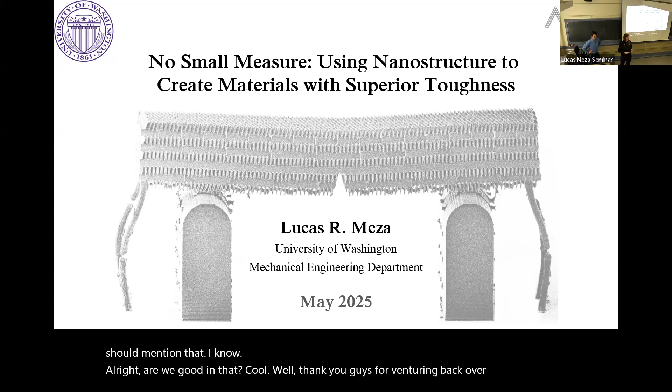We're lucky enough today to have our own Lucas Meza. In case you haven't met Dr. Meza yet, he got his PhD from Caltech, where he did a lot of work on ultralight metamaterials, and then he traveled to the University of Cambridge for his postdoc, where he worked on 3D woven fiber composites. It's been really fantastic to have him here at UW. I know it's never easy starting around or near the pandemic, but I've been amazed at the collaborations he's established around campus and in many different domains. He's really looking at how we can use nanoscale architecture to build better materials across many different domains, and it's just the start to many great things. So with that, we'll turn it over to Lucas.

Thanks, Kat. Really excited to be talking to y'all about what we've been doing for the last 5 years. Building a nanomechanical experimental group in the middle of a pandemic was not fun.

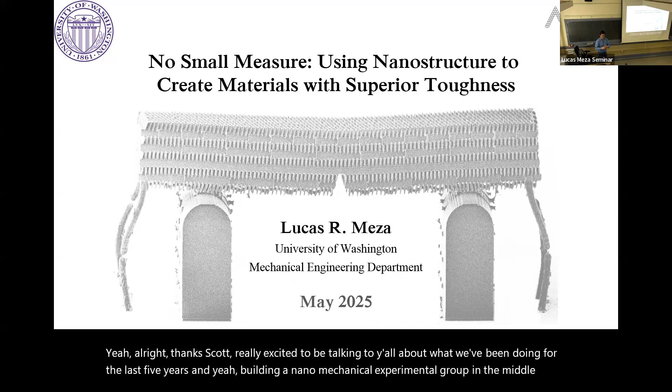Today, I'm going to be focusing the talk on fracture toughness. Toughness is a really weird property, difficult one to wrap your head around. I started this journey not actually understanding fracture at all, so I came from totally outside the normal fracture mechanics community and have tried to make some inroads there, but from the bottom up.

So to get started, the question we ask with all of our research is, how do we make new materials that are better, stronger, tougher, lighter, et cetera? There's a science fiction version of reality — funny, Kat, that you should mention Iron Man, because this is like ideally what we want to do. I want to pull up this AI periodic table and just moosh some chromium and some palladium together and make some magic material that's going to fly in an Iron Man suit. This is not how engineering works, unfortunately.

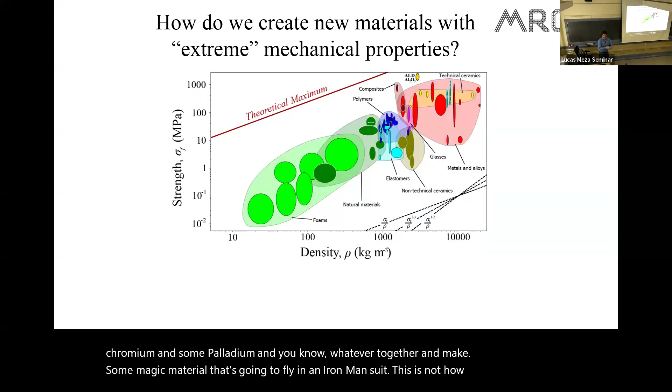Most of the time we have these Ashby plots, or material property plots. This is a plot of strength versus density. I have heavy, strong stuff up at the top right, metals and ceramics, and light, not-so-strong stuff down at the bottom. Our goal is to push into the white space of these material property spaces, make things as light as air but still strong as a foam or a natural material, or take extreme strength materials like diamond and turn them into something ultra lightweight that we can use in engineering. There's been a lot of interesting case studies of that.

My work takes two pieces of that puzzle, trying to break into these new property spaces: architecture and nanomaterials. I'll talk about what all of those are in the context of fracture mechanics. Architecture is literally everywhere around us.

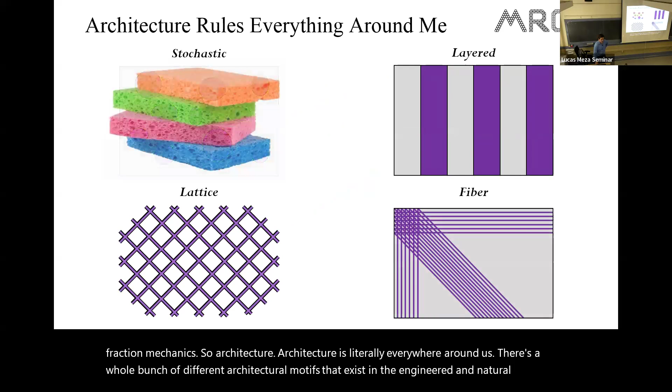There's a whole bunch of different architectural motifs that exist in the engineered and natural world. Most of you probably have a stochastic material sitting on your kitchen counter, and you're probably wearing a layered material right now — the layers in the soles of your shoe give you grippy things to walk on but still squishy things so your feet don't hurt over time, or you may have a reinforced sole for hiking. Now that we're buying lots of stuff online, we see lots of corrugated materials, cardboard boxes — you're increasing the bending stiffness of a piece of paper by adding corrugation. We're probably also wearing fiber composites: our fabrics aren't solid sheets of polymer, they're woven fabrics, cotton or polyester, woven into a structure to be flexible and breathable. We've used architecture for a very long time historically.

I am going to focus on this in the context of fracture. Dating all the way back to some of the earliest materials in recorded history, we have straw-reinforced mud bricks.

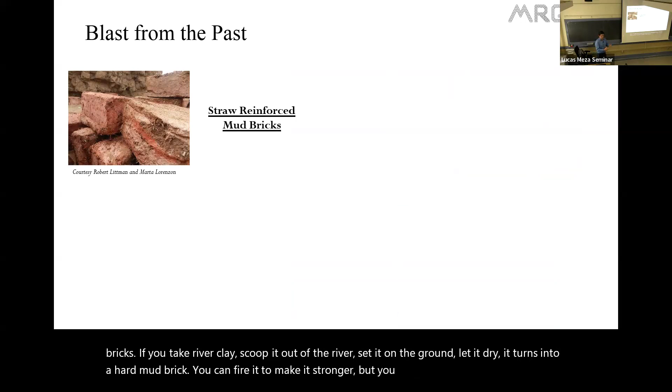If you take river clay, scoop it out of the river, set it on the ground, and let it dry, it turns into a hard mud brick. You can fire it to make it stronger, but pre-fire, we didn't have the ability to do that, so we just let it dry in the sun. If you do that without anything in it, it'll get really brittle and start to crack, like the floor of a cracked lake bed. Very early on, people realized if you just throw some straw in there, you can make something relatively tough. These straw-reinforced mud bricks were used in engineering thousands of years ago. This is an ancient temple in Egypt used as a funerary ceremonial place, and this is a mud brick wall. Engineers have been using architected materials for toughness for a very long time.

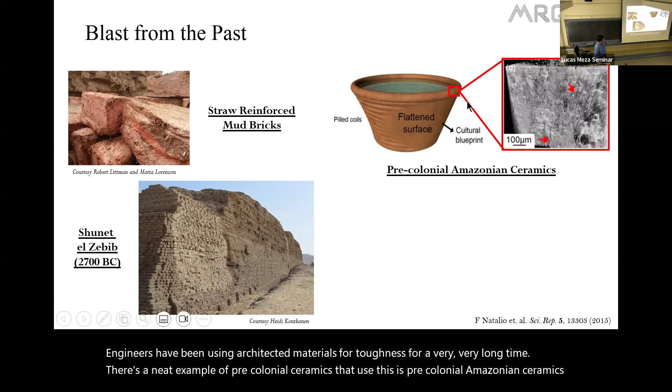There's a neat example of pre-colonial Amazonian ceramics that also used river clay. The native tribes would take glass sponges, break them into small pieces, and weave the glass spicules into their pottery. They had special weaving or pottery-making techniques where they could get the spicules aligned with some of the radial directions to get things that were relatively tough. I was lucky to find a paper where they tried to replicate some of these ancient pottery techniques, which date back hundreds if not thousands of years.

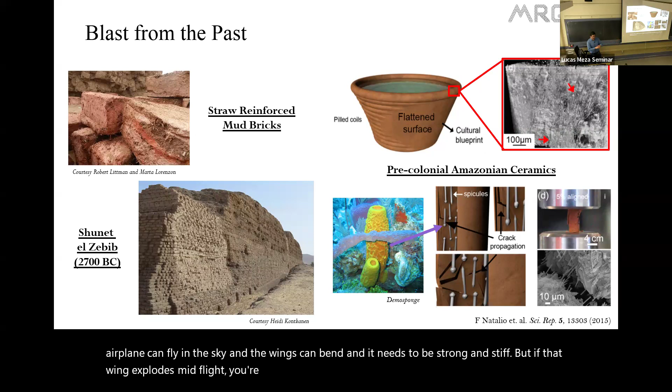Throughout human history, we've been using architecture to make tough materials. A lot of architected and engineered materials focus on strength and stiffness, but toughness - when is something going to break - is really what you care about. My airplane can fly in the sky and the wings can bend, and it needs to be strong and stiff, but if that wing explodes mid-flight, you're not gonna be a very happy camper. So toughness is the thing that governs that property: when is something going to break?

So I've said toughness like 10 times now - what is toughness? Toughness, or fracture, is the unstable propagation of a crack. We have flaws in material - these could exist as a large scratch on the surface, a notch milled into something, or an internal defect like a pore. When you apply a stress to a material, you get that flaw to nucleate and unstably propagate in the solid. So this is fracture: the unstable propagation of flaws.

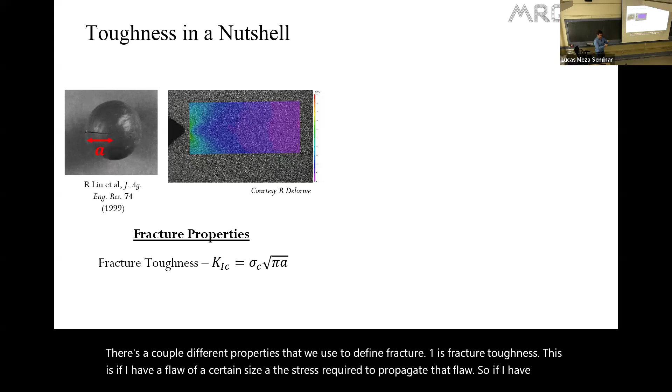There are a couple different properties we use to define fracture. One is fracture toughness - if I have a flaw of a certain size A, it's the stress required to propagate that flaw. So if I have a high fracture toughness material, I have to apply a lot of stress to get that flaw to grow. We also have energy release rate, which is confusingly sometimes called toughness. Fracture toughness and toughness are not the same thing, though they're related to each other. This is the energy it takes to propagate a flaw. So one is stress, one is energy.

I'm going to pull up another Ashby plot here - this is a plot of fracture toughness versus Young's modulus. There's a lot going on, so I'm going to hide most of that. Fracture toughness and toughness relate to each other based on the Young's modulus, so I can draw an iso line of G, toughness, here. This diagonal line is my toughness. When we think about materials that are tough and resilient, intuitively we actually think about G toughness - we don't think about fracture toughness.

As an example, here is soda lime glass on that plot - this is our standard window glass - and natural rubber. Rubber is very soft, very compliant, but also very tough; it's difficult to tear rubber apart. Soda lime glass actually has a higher fracture toughness than rubber because it's stiff - it takes a lot of stress to get it to break, but it has orders of magnitude less energy in the fracture process. So that G is way, way lower for glass.

There's one material in particular that I want to point out here, and that's leather. This is treated leather. Leather is skin - it's our natural barrier to the world - and it's actually one of the toughest natural materials that exist on an energy basis.

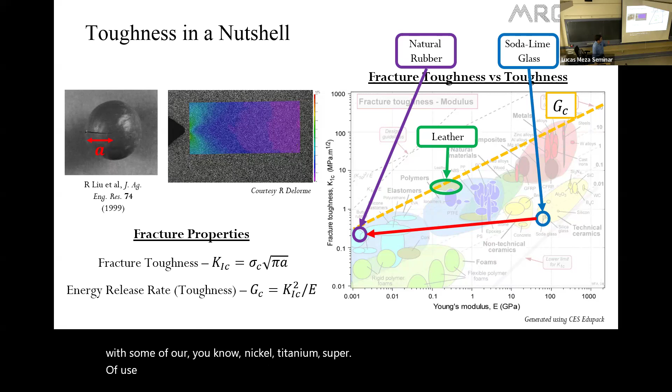So you see here, it's kind of at the top edge of some of these material property spaces, in line with some of our nickel titanium superalloys that we use for jet engine turbines. And when we look at what happens when we try to break leather, this is an in situ fracture test on a piece of leather.

You don't have a crack that just propagates. You have extensive damage. Pretty much all natural materials do this. Leather is remarkable in its ability to do this. I love showing this video, it's super cool just watching all these fibers pull out. But you don't just have a single flaw nucleate, you have a wide dissipation of damage events.

So this distribution of damage is what gives leather its toughness. And pretty much every natural material does this. This is an example of shell doing this. And bone—not only does nature do this, but it does it all the way down to the nanoscale.

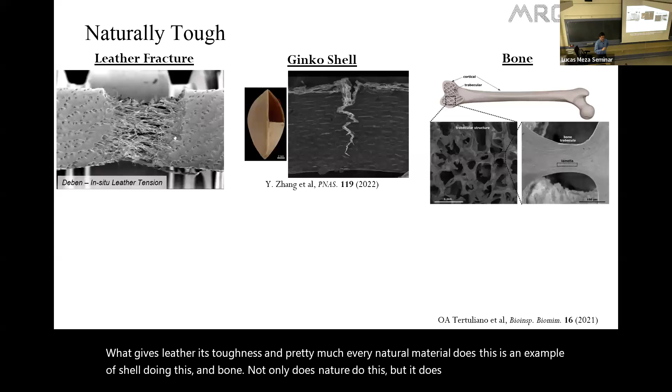This is an interesting paper with one of my collaborators, Ottman Tertuliano, now at Penn, where he took a microscale section of a trabecular bone, put it in an SEM, and did a microscale 3-point bend fracture test on it, showing that you actually get collagen nanofiber pullout in the bone. So all the way down to the nanoscale, natural materials are toughening, and you can see increases in energy release rate all the way down to this nanoscale, nanomicroscale.

So natural materials not only have these interesting fracture toughening mechanisms, they have them at every length scale, all the way down to the nanoscale.

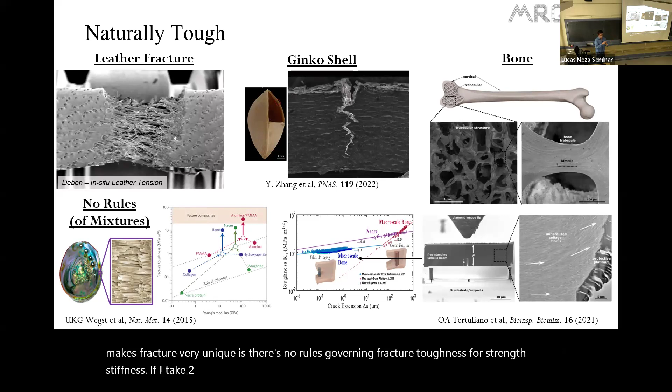And the end result of this, and what makes fracture very unique, is there's no rules governing fracture toughness. For strength, stiffness, if I take two materials and mush them together, it's pretty much the average of those two that is going to be my property that I end up with. I take the volume weighted average of the two. I can't exceed a rule of mixtures for stiffness. I can't exceed a rule of mixtures for strength.

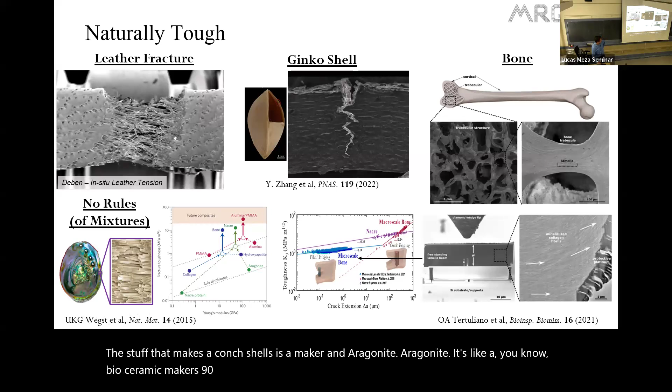Toughness is different. Look at this conch mother of pearl. The stuff that makes up conch shells is nacre and aragonite. Aragonite is like a bioceramic. Nacre is 90% of this bioceramic. If you took a rule of mixtures between those two materials that make up nacre, you would have a very, very low toughness. But what you see is something that is orders of magnitude higher.

So nature is making use of something in these toughening mechanisms, some sort of toughening mechanisms across length scales to derive this enhanced toughness. And this is really what drew us in.

Natural materials show all of these interesting architectures and demonstrate that there's just no limit to where you can go with toughness. So this is really what sparked our interest, and I think the interest of a lot of other folks as well.

So over the past 20 or so years, we've seen lots of examples of engineered materials that try to mimic the structure of natural materials. This is a brick and mortar structure that's meant to mimic nacre, out of Berkeley. This is a Bouligand metamaterial meant to mimic mantis shrimp claws, dactyl claws, so you have twisted fiber structures.

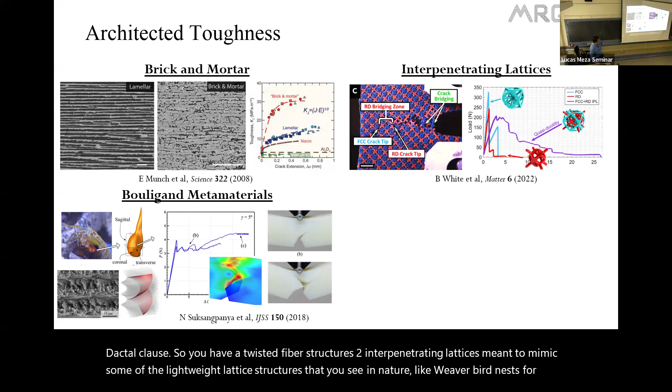This is out of Purdue—interpenetrating lattices meant to mimic some of the lightweight lattice structures that you see in nature, like weaver bird nests, for example, that are difficult to pull apart, and bio-inspired glass. So when you incorporate any of these architected material strategies, you start seeing toughening mechanisms emerge.

The big thing when we were getting into this that I think all of these folks missed was the length scale. Maybe not missed, conveniently ignored, because it's very difficult to do teeny tiny tests. So we see natural materials are engineered at the micro and nanoscale. It's hard to do that with engineered materials.

So this was our charge, this was our goal: let's see if we can understand toughness at fundamental material length scales in a way that lets us understand the natural world around us and how to really push to the boundaries of engineered toughness in materials.

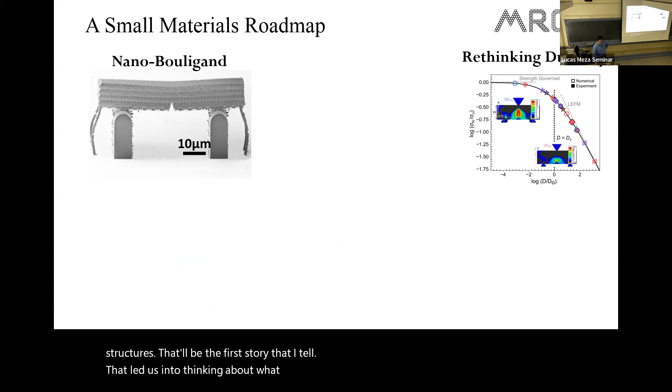So I'm going to talk about a few different projects here. We started off with nano-Bouligand structures—that'll be the first story that I tell. That led us into thinking about what ductility was to begin with. We started off with complicated architectures and then we went very simple, then started building it back up into slightly more complicated architectures with layered structures, nanofoams, spinodal architectures, and interpenetrating lattices.

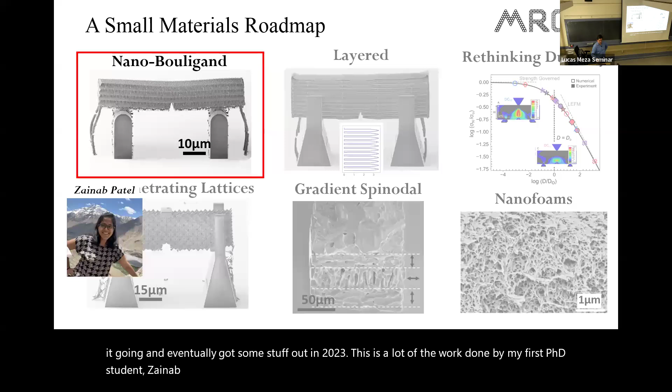All right, so this is a nano-Bouligand beam. You can look at the scale bar here. I was going to bring samples, but my samples look like specks of dust on a chip. I could have passed them around, but there's not actually much to look at—you can't see it with your bare eye. This is an 80 micron length beam. For reference, the thickness of a standard piece of computer paper is 100 microns, so this is thinner than a piece of paper. A human hair is about 50 to 100 microns in diameter, so this is smaller than all of those things. Again, it looks like dust.

We write these using two-photon lithography—I'll talk about that in a sec. The smallest features on here are these nano line traces, which get down to about 500 nanometers. We build these into different architectures, different twist angles, and we actually fully print this whole setup. You'll see some debris; I'll talk about what that comes from in a sec.

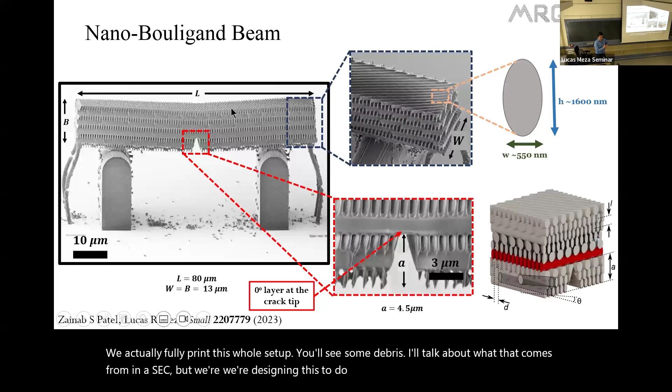But we're designing this to do a fracture test. Fracture is a difficult test to do, so we had to print our own setups to understand this.

So we design these numerically. We have Python codes to do voxel level control over these prints, so we manually define where all of these lines go. This is done in a two-photon lithography process—like stereolithography, SLA printing, if anyone's familiar with that, we use light to cross-link material. We can do this with an infrared laser, so it gets cross-linked in a very teeny tiny spot size. Minimum features are about 100 to 150 nanometers, and you take that and trace it around in space to create these architectures. So this is where we started, with this Bouligand beam, actually with a lattice substructure underneath.

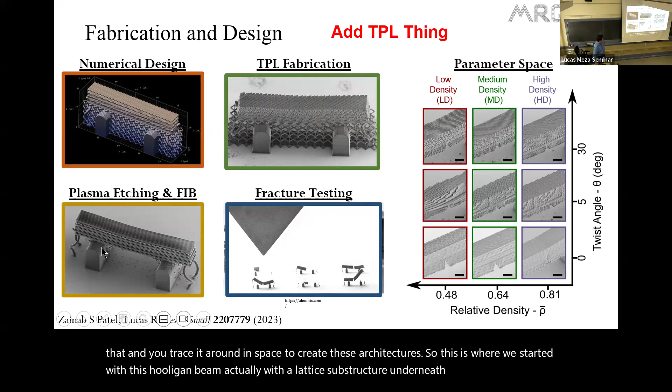My slides are auto-advancing, we'll see. We actually have to plasma etch to remove the substructure underneath this, because we want a freestanding beam, but if we printed it freestanding it wouldn't survive—it would just fly away when we developed it.

So we etch away this lattice with a plasma, and then we do fracture testing. We tested out a range of densities and a range of twist angles here, trying to explore this parameter space. This is what one of the tests looks like.

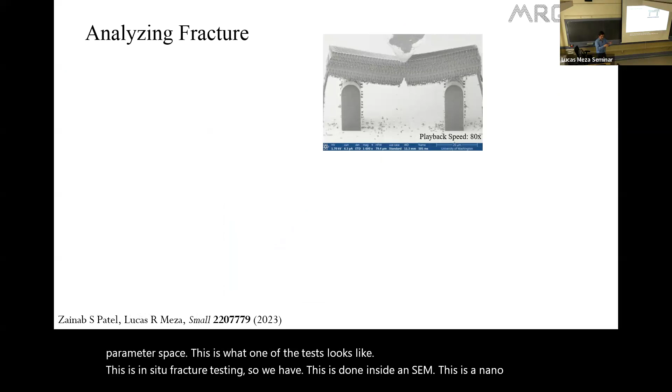This is in situ fracture testing, done inside an SEM. This is a nanoindentor that lives on a little platform that we plug into an SEM, and we do these tests. When we're analyzing these, we get load displacement data out. Much like you would with a standard Instron test, we actually superimpose a sinusoid on top of that, so we can measure unloading stiffness continuously during the process.

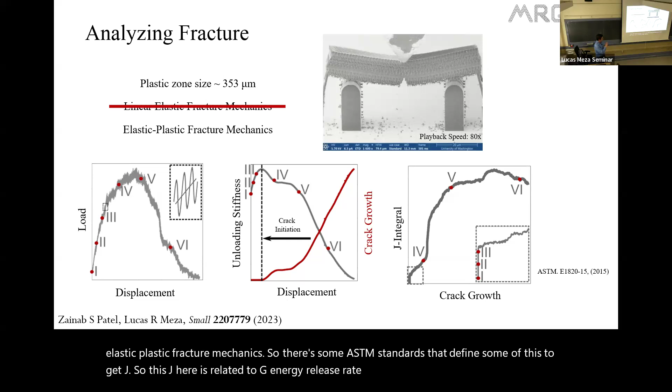From that unload stiffness in the test, we can figure out how much the crack has grown in the material, and we can use that crack growth along with not linear elastic fracture mechanics, but elastic plastic fracture mechanics. There are some ASTM standards that define some of this to get J. This J here is related to G, the energy release rate during fracture. The J is the evolution of that—so eventually when you have a fully developed crack it is G, but just keep J and G kind of the same in your head.

In terms of defining material properties here, in this particular study we looked at one layer of crack growth. You can see it's difficult to track exactly how this crack is evolving over time, but we looked at the J, the energy released after a crack had grown one layer, in all these materials.

So you'll see a lot of J1L values being reported here.

Sort of an arbitrary metric, but useful for the architectures that we were looking at.

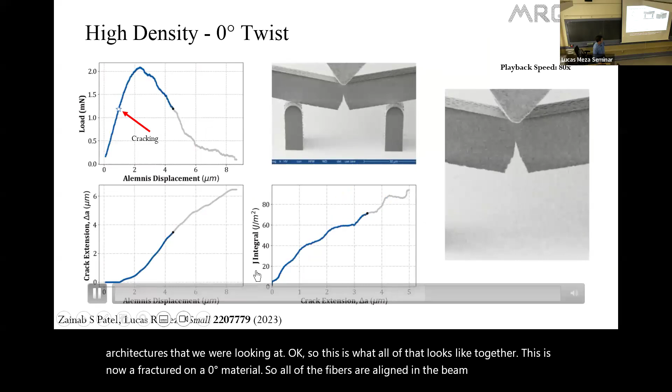Okay, so this is what all of that looks like together. This is now a fracture test on a 0 degree material, so all of the fibers are aligned in the beam direction. We can see the crack grows, we get a rising J curve, and the crack propagates relatively quickly through the solid.

When we have a twisted material, you'll notice the crack propagates a little bit more slowly. It's a little bit more difficult to get that going through. We have a higher J resistance to that crack growth.

When you look at these kind of side by side, a solid beam will have a crack that goes through relatively rapidly. As you reduce the density, you actually notice the crack doesn't propagate as easily in the solid. So this was an odd finding that I'll talk about more in a sec.

And when you have higher twist angles, kind of the same thing happens. That twisting of the layer really impedes crack growth. And so this alone was an interesting result, but we wanted to figure out what really was going on here.

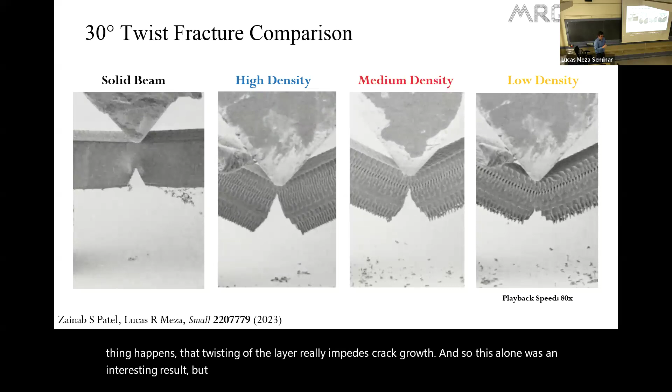My strength and stiffness is going to decrease proportionally to the amount of material that I'm removing. And if I twist my fibers out of the direction of loading, if I am applying a bend test on a 0 degree versus a 90 degree, it's going to be a lot less stiff when I'm applying a load orthogonal to the fibers. But the J was not that.

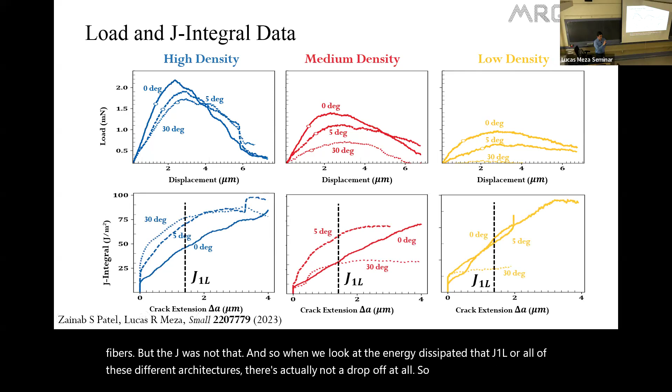And when we look at some of that data and we zoom in, I'm just going to focus on the 0 degree twist angle. So this is all the fibers aligned with the twist, aligned with the beam. We show that when you reduce that density from something that's about 80% dense to 45, 50% dense, you actually maintain your toughness, which is weird.

Because if you just look at a rule of mixtures, if I take out half my material, there should be half as much stuff dissipating energy. Where is all that energy coming from? So this is not what we're seeing. I'm not seeing any sort of a rule of mixtures.

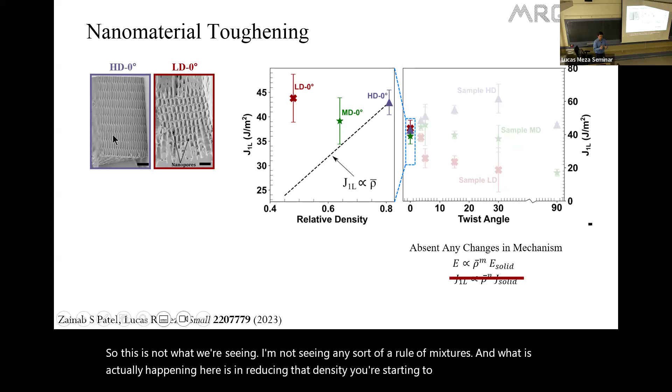And what is actually happening here is in reducing that density, you're starting to create nanoporous structures, nanoscaled voids. Actually, as a printing defect, the fibers are a little bit wavy. So even though it's like 50% dense, we don't have beams that are just going to fall apart. There's kind of like periodic interconnections between them. So you end up with almost isolated nanofibers.

And when you look at the toughness of nanofibers alone, it turns out nanofibers are more ductile than their bulk counterparts. If you make a polymer nanofiber, it ends up being stretchier than a bulk material would be.

We showed that experimentally using some of these different loads. The lowest density material had a much higher strain to failure. It was stretching more before it started to break. And so what we're seeing here is actually size-enhanced ductility.

So we're getting more plastic energy dissipation, we're getting more ductility in the material by creating these nanoscale voids, which was an interesting first result. But why? Why is it more ductile? So that's where we got stuck on next.

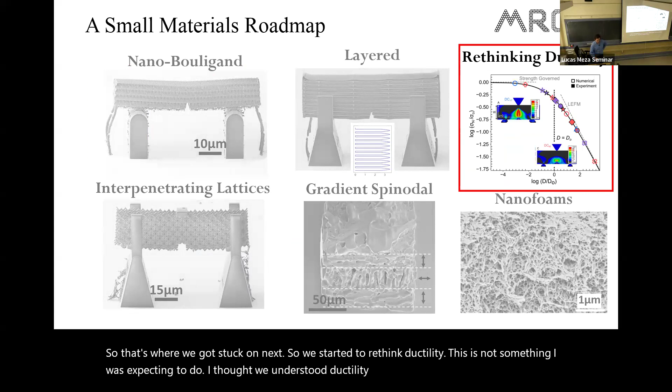So we started to rethink ductility. This is not something I was expecting to do. I thought we understood ductility, plasticity. We started this kind of just as a one-off, trying to get some material properties, and ended up turning into a really interesting story. This is where some of my other PhD students now, Kush and Aziz, start to come in, working with us on this.

So instead of creating an architected fracture sample, we just wanted to make solid beams. Got rid of all the twisting, all the layering, made these solid single edge notch beams. In the printing process, we can control laser power.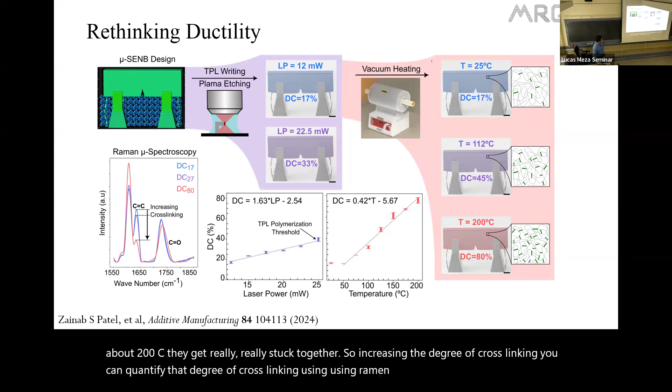By controlling laser power, you can change the degree of cross-linking of the material. You can also use heat treatment to additionally cross-link your material. If you expose it to a little bit of laser light, you have polymer chains that are a little bit bonded together. If you heat it up to about 200°C, they get really, really stuck together, increasing the degree of cross-linking. You can quantify that degree of cross-linking using Raman spectroscopy and correlate the writing parameters, in this case laser power or temperature exposure, to an end degree of conversion.

So here the lowest degree of conversion, where it actually stays together and doesn't just dissolve, is about 17%, and the highest we got was about 80%. So those are our two bounds, 17 to 80.

So when testing these, we were starting to do fracture tests. You'll see, this one flies away. The very low degree of cross-linking one is very, very ductile. It's nice gradual deformation. You see it's the blue curve here, pretty much a nice stable load plateau, ductile tearing. The 27% one shows a load drop, a stable-ish fracture.

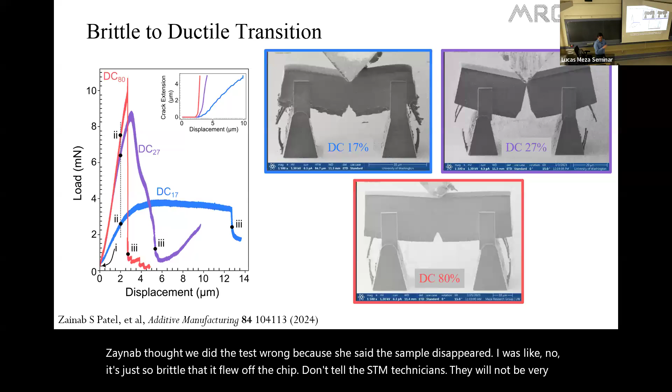When we tested this DC80, the 80% one, Zainab thought we did the test wrong because she said the sample disappeared. I was like, no, it's just so brittle that it flew off the chip. Don't tell the SEM technicians, they will not be very happy. So we made teeny tiny polymer samples all over the SEM somewhere. But you see this kind of catastrophic load drop. This is indicative of a very, very brittle fracture.

Looking at the J, these all initiate at a similar J, but the lowest degree of cross-linking one has a much higher energy dissipation. You can see the sort of inverse correlation. As you increase degree of cross-linking, you increase your stiffness and strength, which is normally desirable, but you also drastically decrease your toughness. So you're getting 4 times increase in stiffness, but 6 times decrease in your energy dissipation toughness. So this was the data we were looking for, but that doesn't explain why it was more ductile.

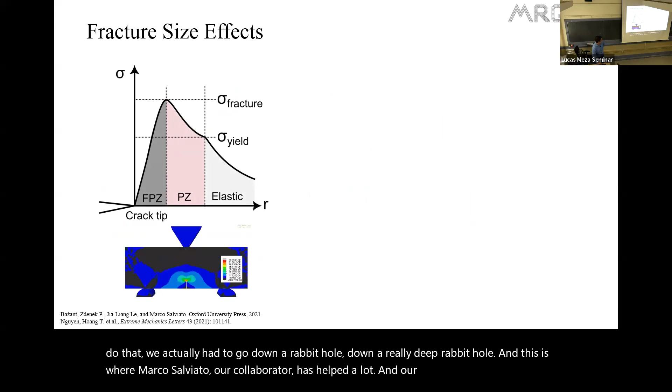To understand that, we actually had to go down a rabbit hole, a really deep rabbit hole. This is where Marco Salviato, our collaborator, has helped a lot in our understanding of this. In a fracture process, there's this little ball of energy that propagates in the solid. So you have a flaw, you create a stress, that ball of energy grows to a finite size.

That is the J or the G, that's the critical strain energy release, and then that propagates unstably through the solid. Now, in that zone, there's actually 2 regions. Outside, there's an elastic zone, there's some plastic energy dissipation really close to the crack, and then there's damage. So a plastic zone and a fracture process zone. The size of this, we call Rp. The relative ratio between these is important for a range of things that I'm not going to talk about yet.

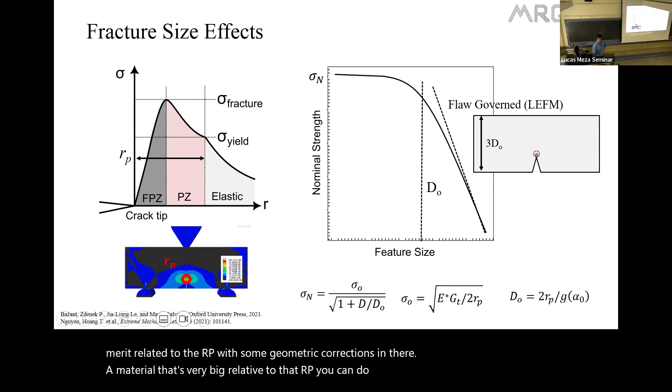But when you plot out the size of the sample relative to this fracture process zone, where D naught is a non-dimensional figure of merit that's related to the RP with some geometric corrections in there - a material that's very big relative to that RP, you can do linear elastic fracture on. This is what all of our ASTM standards are designed for. You have big sample, small RP, I can bend it and I get a KIC out of that.

But when my sample is small, I end up falling into a strength governed regime. I reach kind of a theoretical plateau strength of a material. So these are theories that have been around. Zdenek Bažant at Northwestern is a pioneer of this, has been doing this since the 80s, mostly for concrete, mostly for brittle materials, and never in the context of ductility. They just kind of say, oh, it broke or yielded, and then that's it.

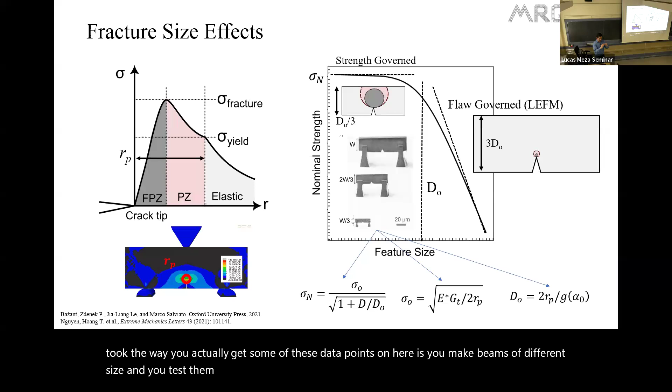So what we did - the way you actually get some of these data points on here is you make beams of different size and you test them. It's literally it. You make big, small, smaller, and you break them and you see what strength they break at. And that's how you plot out the space.

And then you can get some material properties. We wanted to see if we could understand our ductile to brittle transition in the context of this fracture size effect, the size affected length of fracture. So we did numerical modeling because it's actually difficult to do a fracture test with nanoscribe samples, something that's 3 millimeters or 1 micron. We're somewhat limited in how big or small our samples can be.

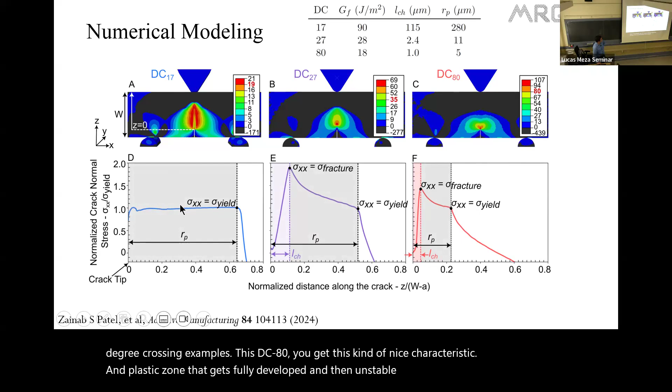When we look at this numerically, you can see the lowest degree of cross-linking and the highest degree of cross-linking samples. This DC80, you get this kind of nice characteristic damage and plastic zone that gets fully developed and then unstably propagates. In this DC17, you actually not only don't see a hardening, you don't even see damage developing.

When you look at the size of these zones now, that RP, LC, focus on the RP right now, this whole sample is 26 microns thick. That was our beam dimension size. Here, the RP for the highest degree of cross-linking was 5 microns. So 5, 26, we're much smaller than the size of the beam. We can fully develop our process zone.

It fully develops, unstably propagates in the material. The DC17, that plastic zone size is 280 microns, so 10 times bigger than our sample size. Not only that, the damage zone, the LC, the fracture process zone, is 115 microns, also way bigger, 5 times bigger than our sample. The sample is too small to actually develop damage. So what we see is ductile tearing. This is a fracture size effect.

So if I take that same material now numerically, that 26 micron beam with that 280 micron radius of plasticity, I see ductility, this nice gradual tearing. If I took that same thing and I made it 3 millimeters, much, much bigger than the size of the sample, I get a brittle behavior. Same material, same degree of cross-linking in this case, now size affected.

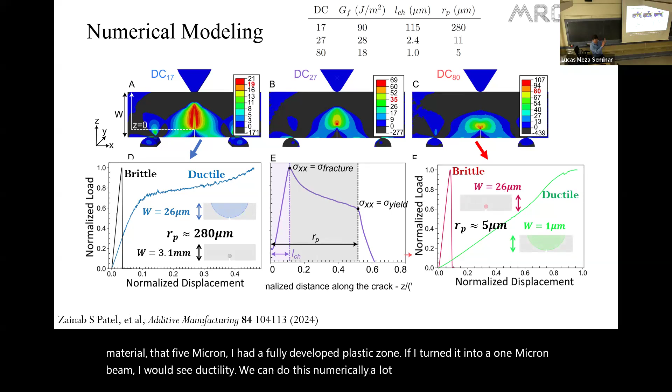If I took that DC80 material, that 5 micron, I had a fully developed plastic zone. If I turned it into a 1 micron beam, I would see ductility. We can do this numerically a lot easier than we can experimentally, so these are all numerical. So ductility in and of itself is actually a fracture size effect. There's no such thing as a ductile or brittle material. There's only materials that are ductile or brittle at the size at which they exist.

So this was our rethinking ductility. There's been a whole bunch of results through history on brittle to ductile transitions, dating back to the Liberty ships. I show this in one of my intro mechanics of materials classes. We made some ships, put them in a harbor in Oregon, they cracked in half, and we're like, oh, why? Why did that happen? I need to understand fracture mechanics better.

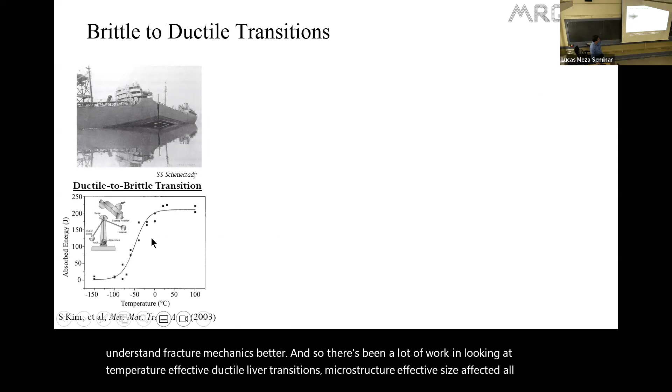And so there's been a lot of work in looking at temperature affected ductile to brittle transitions, microstructure affected, size affected. All of them look at, I take a sample and I break it and I have some energy dissipated based on these temperature affected changes. What they've actually been seeing, and we're trying to write a review paper summarizing this now, is they've induced a ductile to brittle transition based on this fracture size effect.

So they have, for these very cold materials, the size of the zone shrank, fair, and they got a brittle failure. But the ductility that they're seeing, the energy dissipation, actually came because this is done with a standard ASTM Charpy sample that's 5 millimeters across and 8:1 aspect ratio beam with a notch in it that's at a 45-degree angle. There's your Charpy impact standard.

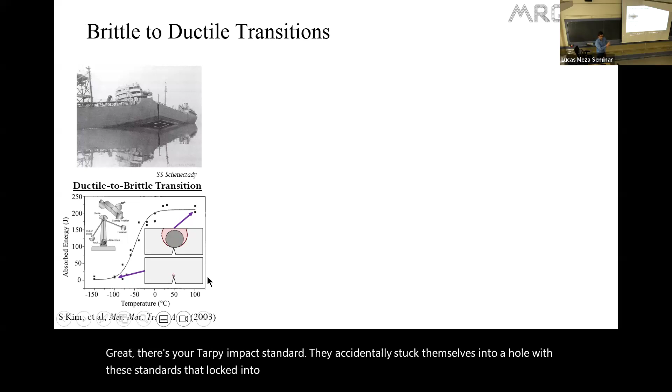They accidentally stuck themselves into a hole with these standards that locked into materials that are ductile or brittle based on the size that they are. If you made this thing half the size, you wouldn't see this transition here, you would see it a little bit lower. And material scientists have been seeing this for a very long time, for decades.

This is an example of an alumina sample, so alumina brittle ceramic, in situ TEM tension. You can see some ductility there and actually a necking prior to failure. So when you make materials small, you actually start to see ductility. This is an example of a silicon nanopillar. You see size-affected ductile to brittle transitions.

This is from 2019. Metallic glasses, also very brittle materials, ductile to brittle transitions. Gallium nitride, nanopillar, ductile to brittle transitions. These are things that material scientists have seen, again, for 10, 20, 30 years in some cases. We've known that this is a thing, but nobody has actually looked at it in the context of these fracture size effects.

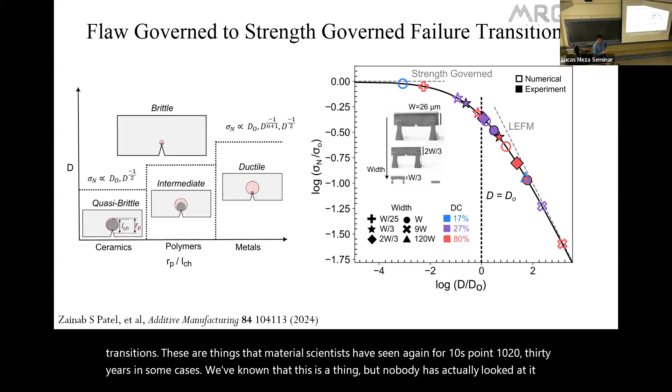So we're trying to go back to all of these. We're writing a review paper now. Stay tuned, hopefully in the next year or so we'll be able to publish what we're seeing in engineering. All of these ductile to brittle transitions, temperature affected, size affected, architecture affected, are fracture size effects.

How are we doing on time? 1:30. All right, cool, making good time.

So how do we build this into architectures now? We're going to do something very simple, the simplest architecture that I can think of, which is stacks of paper, layered materials.

I can go here, I was making solid beams for rethinking ductility. Now we're going to take that and split it up, so one degree of architecture. This is also a continuation of that same work, Zainab Patel.

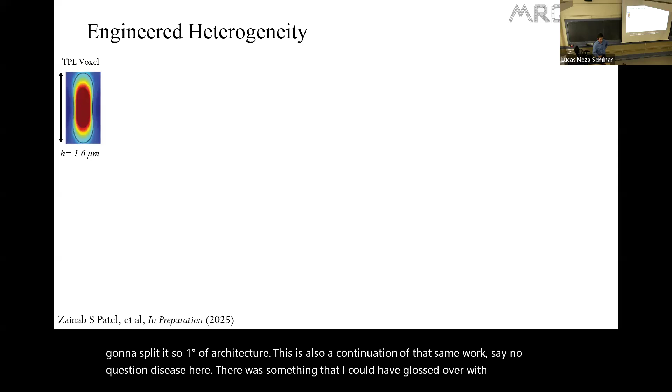Here's something I kind of glossed over with the 2-photon process. When you cross-link a material with a 2-photon process, you actually get a gradient of cross-linking. At the center of the line, you have a higher degree of cross-linking than at the edges. That means by tuning the spacing between the layers as you write them, I can write layers, say this is 1.6 microns, or make the layer spacing 1 micron, so all of these overlap and I get something relatively homogeneous.

I can also make it almost the size of the voxel, and I get the heterogeneity that's there in the line write. Then I can write it further apart and actually make something totally separated. So we used this natural feature of the 2-photon process to create things that were solid, heterogeneous, and separated, and use this as a tool to test architected heterogeneity and size effects.

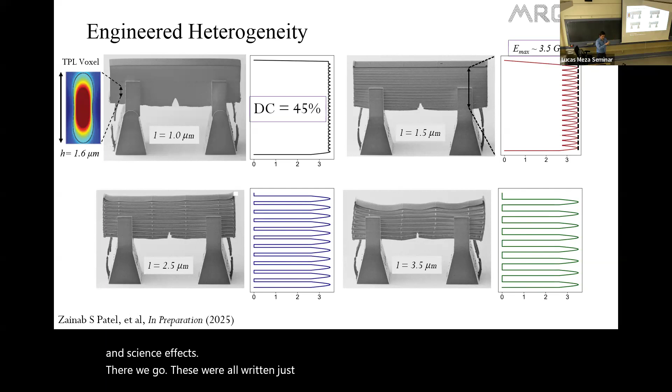So there we go, these were all written just with the tool itself. We didn't do any heat treating, so the max degree of conversion was 45%. So somewhere not super, super brittle like the heat treated ones, but not very ductile either.

Okay, so this is the solid beam. This is a similar fracture test to what you just saw before. Relatively brittle, relatively fast load drop, not catastrophic. It didn't fly off the chip, so you still see cracks growing. Note that the playback speed is 160 times, so this is actually a very long, slow test - it takes like 10 minutes to do, sped up here.

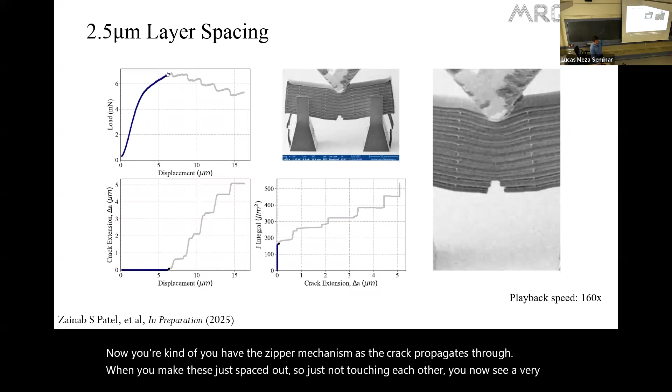When you start increasing heterogeneity, you start seeing a rising J curve. You see a much more stable crack growth, now with a zipper mechanism as the crack propagates through. When you make these just spaced out, not touching each other, you now see a very stable crack growth - you can see it zips through one layer then gets stuck, zips through another layer, gets stuck.

And if you make it too far apart, you won't see it propagate through at all, it'll start to split off, and you see some crack redirection. So we can't really call this a fracture property. These are really nice all stuck together - the 1 micron sample is relatively brittle, the more heterogeneous sample is more ductile, and the fully separated samples are now very, very ductile and very difficult to break.

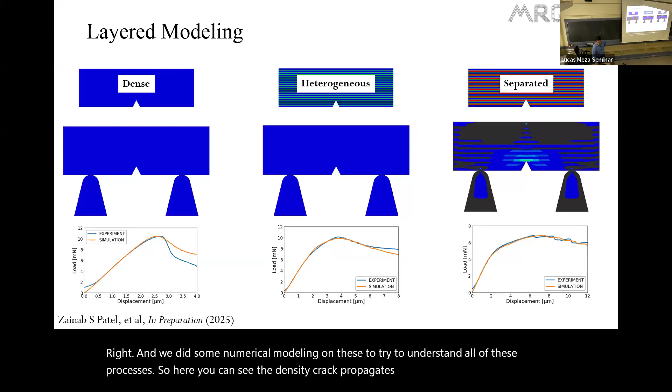So what we've done here - we did some numerical modeling on these to try to understand all of these processes. You can see the dense sample, crack propagates through; heterogeneous and separated materials show a more gradual crack propagation through. This is important for understanding the size and extent of the plastic zone.

What we've started to do here, though, is actually induce ductility in our material. So for that DC45, the radius of plasticity is around 8 microns. All of those individual layers we saw were about 1.5 to 2 microns total in height. So all of these layers, when fully separated, are ductile - we've created a ductile material by virtue of a fracture size effect.

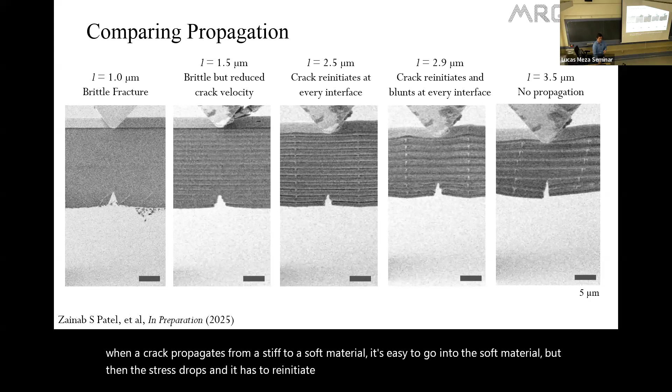You also have an effective architecture. When a crack propagates from a stiff to a soft material, it's easy to go into the soft material, but then the stress drops and it has to reinitiate that crack into the stiff material. That phenomenon has been known for a while - this is architected heterogeneity. So if you just take E1, E2, different materials with different stiffnesses, you get this sort of toughening effect.

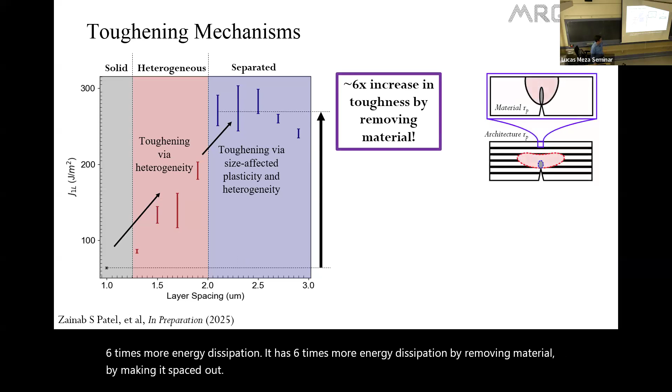What we're seeing is not only this architected toughening effect, but a size-enhanced ductility toughening effect. By removing material, we're getting an actual absolute energy dissipation, making something that is 6 times more energy dissipation by removing material, by spacing it out, all by inducing this fracture size effect.

So we have to think about this in context: you have a material radius of plasticity. Now you have a new emergent architectural radius of plasticity. As you start to introduce separation in these solids, you enlarge the size of that plastic zone. When I create these layered architectures and force a crack to get stuck and redirect, that plastic energy dissipation has to happen somewhere, and it ends up getting spread through the sample.

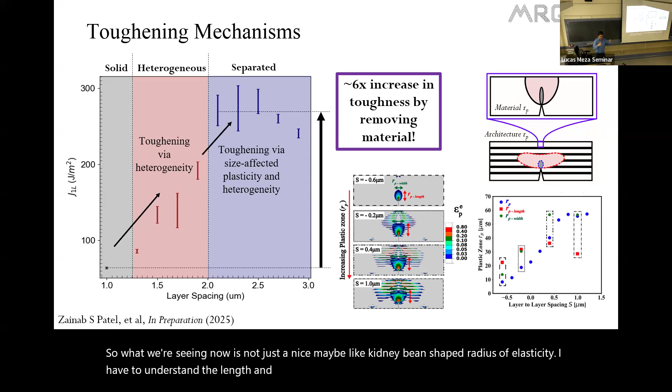So what we're seeing now is not just a nice, kidney-bean shaped radius of plasticity. I have to understand the length and depth, or the extent, of that plastic dissipation happening in the material. So I'm getting now a material and an architected size effect.

And this is what is happening in nature. If we look back at natural materials, nacre, or Euplectella sponges—these are sea sponges made of mostly ceramics—the layer spacing you see is on the order of tens or hundreds of nanometers. Nacre platelets, with a 2-micron scale bar, are 500 nanometers thick, and for a reason.

That reason is that it's just small enough to start being plastic, where you're starting to activate this size-enhanced ductility in the individual layers along with an architected ductility.

So you see natural materials are great at not breaking. They do this so you see this quasi-ductile or quasi-brittle behavior, gradual bending—take these sea spicules that are 99% ceramic silica for the Euplectella sponge, or calcium aragonite for nacre, and you see ductility. There's been a lot of discussion on toughening mechanisms, how the zigzag or the soft layer in between these things affects the properties, but I think we still need to prove this is all a fracture size effect.

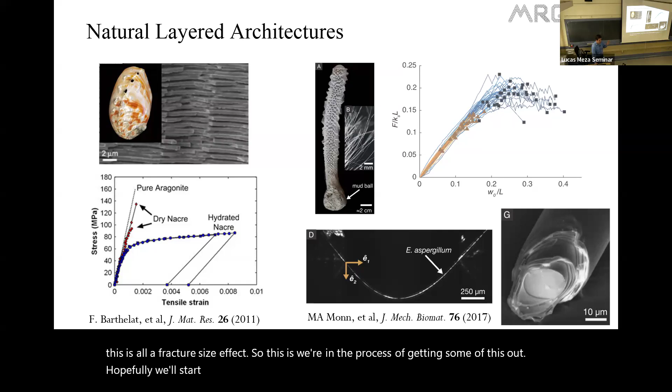So we're in the process of getting some of this work out. Hopefully we'll start to change some of the conversation around how we think about material ductility.

Okay, let's talk about nanofoams. This was one of the early big collaborations that we had—Vipin Kumar, Marco Salviato, and the other PIs on the project, Kush and Santosh, were big players in this. This started off because foam mechanics has been around for a long time; we've been making foams for a very long time.

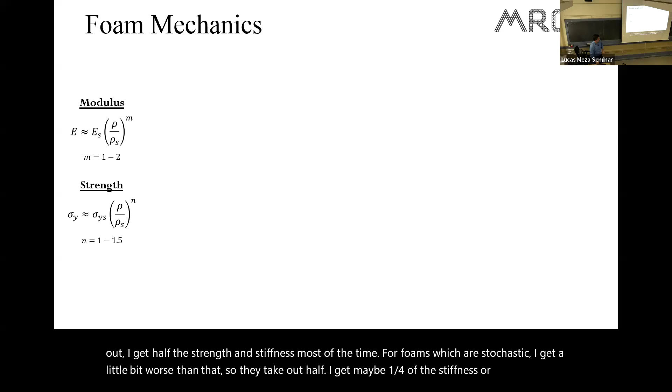We've understood their mechanics reasonably well, or what we thought for a long time. The strength and stiffness of foams generally scales with density. If I reduce the density of a foam, I'm limited by the Voigt bound, a linear scaling—if I take half the material out, I get half the strength and stiffness. Most of the time for foams, which are stochastic, I get a little worse than that, maybe a quarter of the stiffness or strength. It depends exactly on the foam architecture.

Fracture toughness for foams was, I thought, a reasonably well-developed thing. For fracture, you have to have a length scale—there's a size of a flaw, and for foams, there's a size of a unit cell. So foam fracture toughness didn't just depend on relative density, it also depended on length scale, the size of the foam. These classic foam fracture scaling laws said if I make the pore smaller, I'll end up with a less tough material, scaling approximately with the square root of the cell size—1/10 the cell size, 1/100th the cell size, 1/10 the toughness.

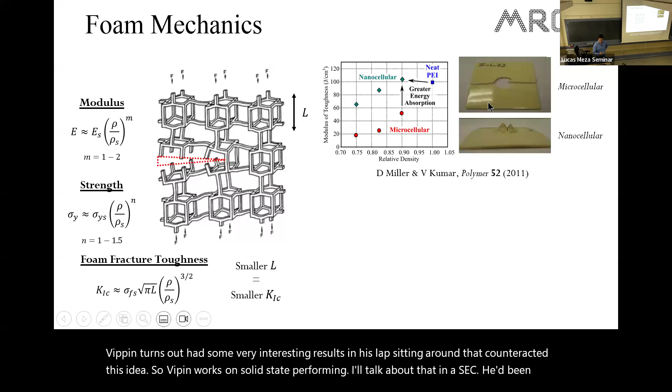Vipin, it turns out, had some very interesting results in his lab that counteracted this idea. Vipin works on solid state foaming. He had been doing impact tests on micro and nanofoams, showing that microfoams under impact at the same density were relatively brittle, but nanofoams were not—nanofoams had this enhanced plasticity, this pullout.

These were drop tower tests in the ME testing lab. In some cases, by inducing that nanoporosity, you actually had higher energy dissipation than just the base material—it got tougher than the base polymer itself. These were done on PEI, polyether imide, a high temperature, high performance thermoplastic.

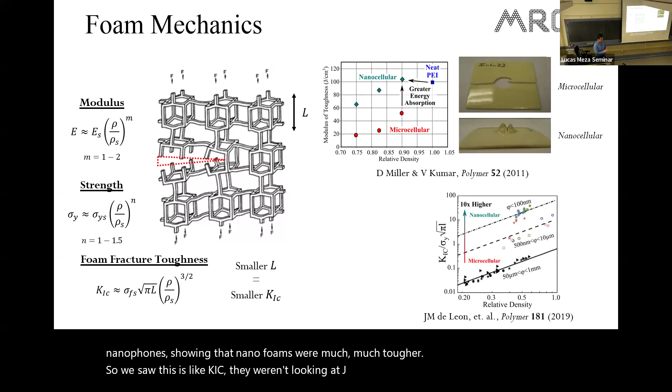Around the same time I started, there were results coming out of my former group in Cambridge, so I knew about it. They were looking at doing fracture tests on micro and nanofoams, showing that nanofoams were much tougher. We saw this in KIC, though they weren't looking at J, which wasn't quite the right way to do it. We saw these results and said, okay, something is happening here.

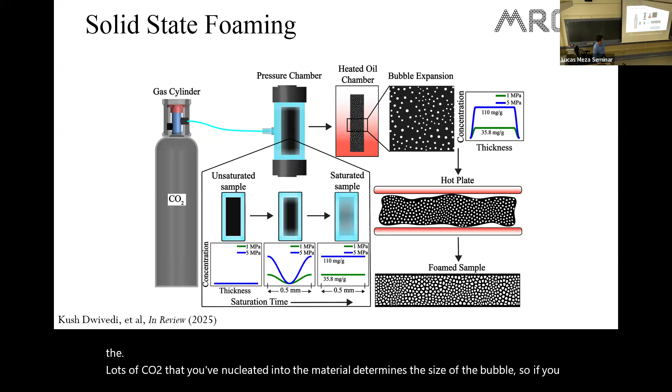You have a certain amount of CO2 that dissolves in that material. You take it out, heat it up, and the dissolved CO2 nucleates as bubbles. The amount of CO2 that you've nucleated into the material determines the size of the bubble. If you put a lot of gas in, you end up with smaller bubbles because more bubbles nucleate, so you get nano or micropores.

If you put a little bit of gas in, in this case 1 MPa CO2 saturation, you end up with pores on the order of 5 to 30 microns, depending on the exact parameter conditions. You can control the temperature of the foaming process and control relative density, so you have nice control of 80% to 50% dense foams. You can also do that at higher pressure and get nanofoams, with nano-sized bubbles around 10 to 40 nanometers in diameter with similar densities.

So you can explore that 70% dense to 40% dense parameter space. We wanted to see if there was a demonstrable difference in the energy dissipation between these materials, so we could figure out why we were seeing these odd results with nanofoams and not with microfoams, and not even necessarily with the base material—they were outperforming the base material in some cases.

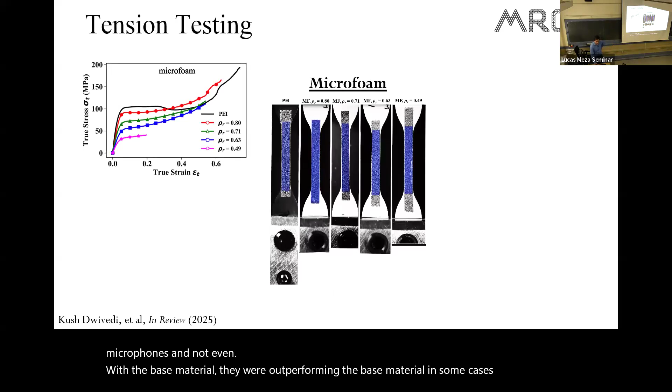This is some of the excellent work of Kush and Santosh. These are DIC experiments, digital image correlation tests on uniaxial tension samples. You can see the neat PEI on the left side, and the lowest density foam on the right. These actually form what's called a Lüders band, so you have a softening region in the PEI that propagates through the solid—an interesting phenomenon.

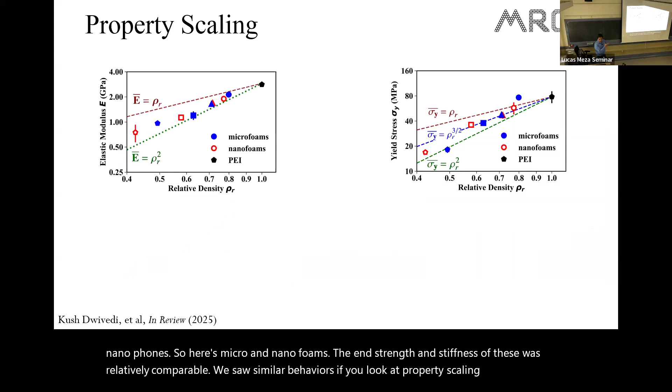From these tests you can get a true stress-strain behavior, which is very difficult to get experimentally. Most of the time we report engineering stress-strain because it's hard to do these, but we were able to get true stress-strain for micro and nanofoams. The end strength and stiffness of these was relatively comparable, and we saw similar behaviors. If you look at property scaling, these fall where you'd expect foams to fall, within that range of properties for Young's modulus and strength. There was a point where these had a lower strain to failure, which was actually an interesting point I'll talk about in a sec if I don't run out of time.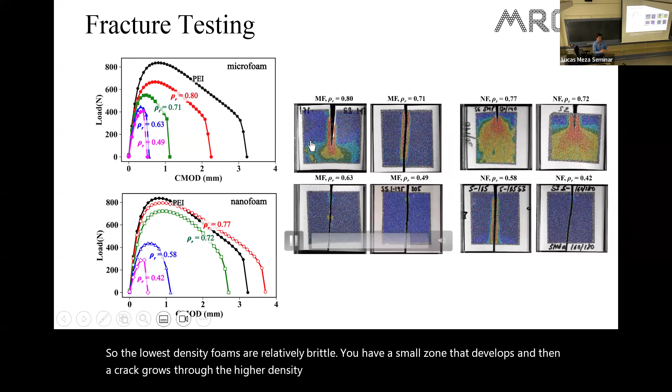So the lowest density foams are relatively brittle. You have a small zone that develops and then a crack grows through. The higher density foams, you can see extensive plasticity, a lot of plasticity in the material. And interestingly here, PEI is this curve in black.

Microfoams, when you start reducing density, you see a lower toughness. For nanofoams, we actually saw a higher strain to failure and more area under the curve for these nanofoams. Something was happening differently where this was actually exceeding the performance of the base material.

When we look at the energy dissipation for these foams, this is just a linear scaling. There's not great rules for density, foam energy dissipation with density. You can actually see that highest density nanofoam not only exceeds the rule of mixtures, but exceeds the absolute energy dissipation of the base PEI material. If you look at that law that we talked about before, this kind of predicted scaling law,

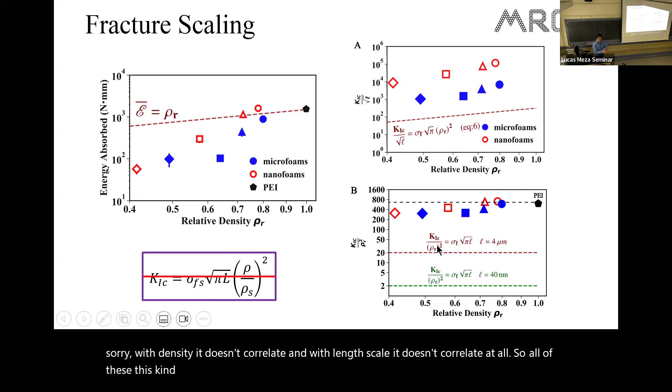if you try to plot KIC normalized by length scale, it's entirely off. It doesn't correlate with the size of the pore at all. And if you try to look at it with density, it doesn't correlate, and with length scale, it doesn't correlate at all. So all of this, this kind of classic rule of mixtures that we saw with foams doesn't apply for these micro and nanofoams.

So why was that happening? To understand that, we had to go to numerical modeling to piece apart how much energy was being dissipated in fracture and in plastic energy dissipation processes. This is some of the excellent work by Kush.

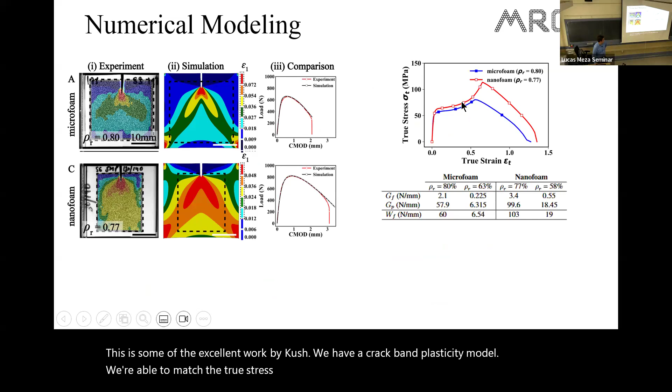We have a crack band plasticity model where we're able to match the true stress strain behavior of the material. And we can actually pull out not just the work of fracture of the material, but the individual contributions of work of fracture. So we can see that between micro and nanofoams, GF is the damage, the fracture energy dissipation, GP is the plastic energy dissipation. So what you're seeing now in going from a micro to a nanofoam, you're getting a little bit higher fracture energy dissipation, but you're getting double the plastic energy dissipation.

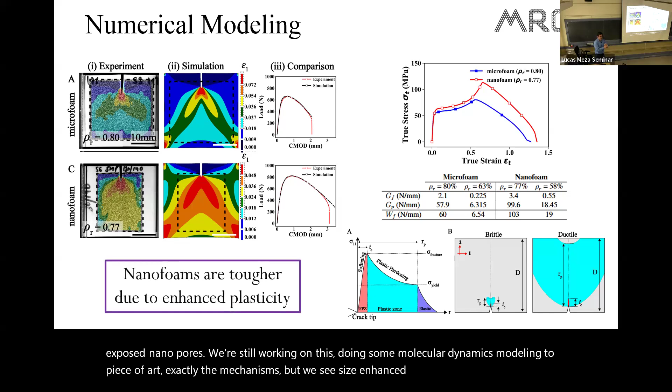So something is happening in these nanofoams by creating these exposed nanopores. We're still working on this, doing some molecular dynamics modeling to piece apart exactly the mechanisms, but we see size enhanced ductility of that nanofoam. So something about the nanoporosity is actually enabling the motion of the polymer chains that's giving us much, much higher plastic energy dissipation, in some cases, again, exceeding that of the base material.

So yeah, this was a really interesting piece of work, still ongoing, still getting some stuff out. I'm gonna run out of time to talk about gradient spinodal structures and interpenetrating lattices.

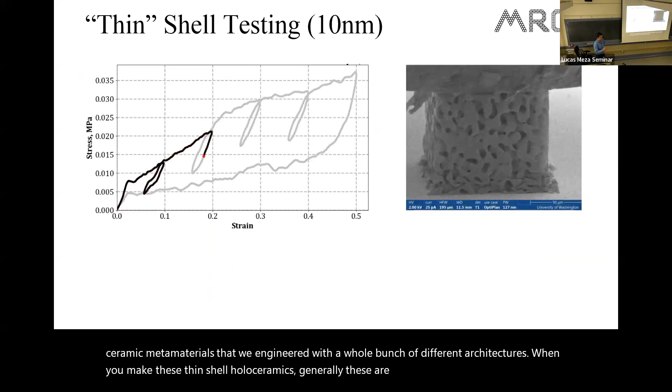So I'm gonna jump through these really quick and just show these are thin shell ceramic metamaterials that we engineered with a whole bunch of different architectures. When you make these thin shell hollow ceramics, generally these are recoverable. So you can see this is an isotropic structure, gets compressed and then bounces back fully.

This is some of the work that I related to work that I'd done in my PhD. This is the shell buckling induced phenomena, and buckling is elastic. So you can make something that is a ceramic, but that is bouncy for a whole bunch of different architectures.

But when you make it thicker, you start seeing damage. So ceramics break. If it gets too thick, you'll see fracture instead of buckling, and you won't see any recoverability in the structure. But when you start to introduce gradients in the structure, we still see fracture, cracking, but these structures are actually able to fully recover.

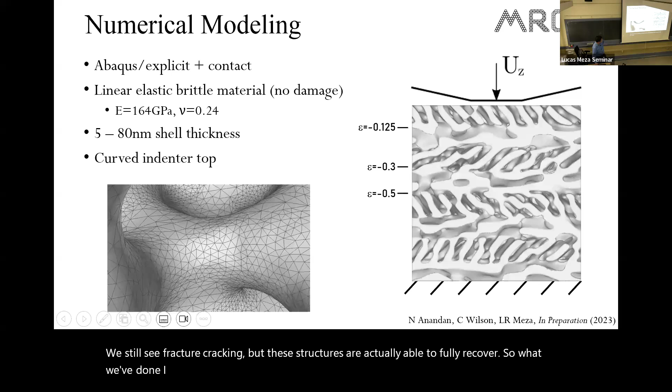So what we've done, I think, and I'm gonna skip through lots of stuff here, did lots of numerical modeling, trying to understand fracture, stress concentration sites. What we've done now is in a quasi-brittle material, this is a material with very limited plasticity inherently. We have in the isotropic structure a very small damage zone size.

So this zone fully develops, you get a crack, it cracks, the material is broken. In our gradient layered materials, the fracture process zone is actually bigger in this case than the size of the layer itself. So even though the material is brittle, you can start to see damage, but if you don't develop that fracture process zone fully, you don't get catastrophic failure. So you get something that is able to recover despite cracking, despite experiencing a lot of local micro damage, and fully recover after compression made from a ceramic.

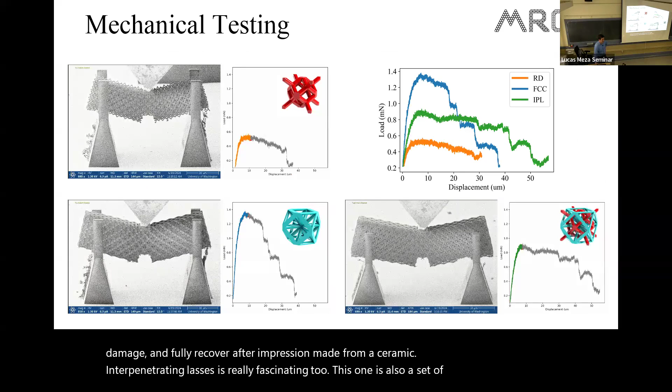Interpenetrating lattices is really fascinating too. This is also a set of really cool experiments, a lot of them done by Zainab and my student Aziz. I'm going to skip through them, but the end result is similar to the layered structure, where we can induce ductility in the individual fibers and beams in the structure and get an architected ductility effect on top of that. That's where I'll stop, since I'm out of time.

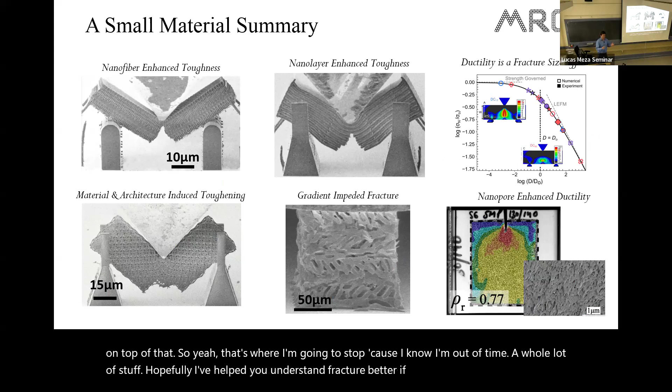A whole lot of stuff. Hopefully I've helped you understand fracture better, if nothing else. Fractures are a tough subject, I know, but we're really plunging the depths of fracture and revealing how little we know about a lot of these things, so there's a lot more to learn. Thanks. I didn't even get to talk about some of the cool work we're doing with other collaborators, like Al Nelson on campus with some of our biopolymers, and Brad Boyce for the interpenetrating stuff. But yeah, thanks, and I'm happy to take questions.

Most of what I do is finite element modeling, and we have some advanced material models to get tension, compression, asymmetry, damage, but that's the extent of it. I know finite element modeling pretty well, and we have collaborators we work with to do molecular dynamics. Marco Salviato can do some, and we have Monica Olvera de la Cruz for some of the biopolymer stuff we're doing. But I'm an experimentalist. Even doing finite element was something I did during my postdoc and learned to do for a reason. That's the extent of my numerical toolkit, FEA.

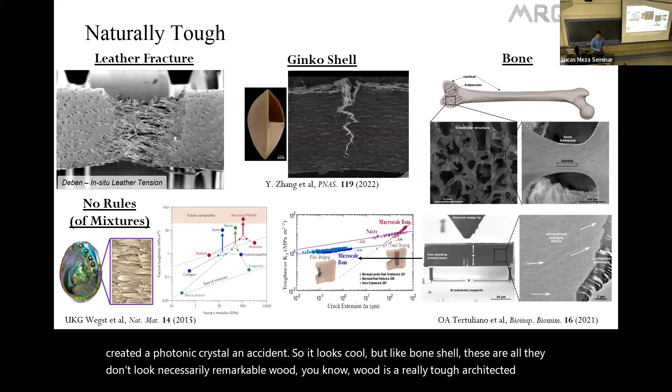This is where eventually we're trying to get to what nature is doing. The structures you see depend on the type of architecture you're using. The reason mother of pearl opalesces is because of those layers, it created a photonic crystal by accident, so it looks cool. But bone, shell, these don't look necessarily remarkable. Wood is a really tough architected material, it doesn't look necessarily different than a normal material, but there's a lot of engineered architecture within the material itself. This is something that, as engineers, is really hard to do.

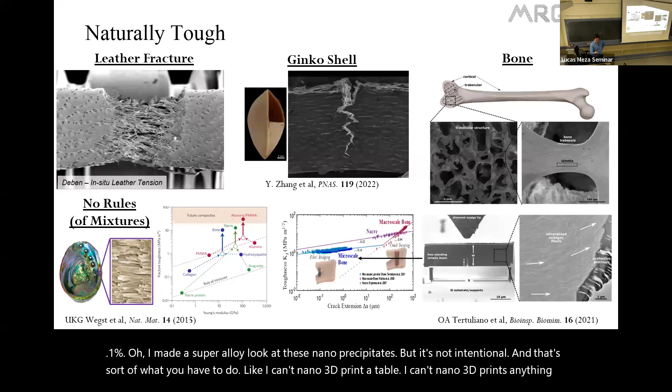We've sort of played metallurgy magic tricks over the years, that's the extent of how we design materials. It's like, let me increase the chromium content by 0.1%, oh, I made a super alloy, look, these nano precipitates, but it's not intentional. And that's sort of what you have to do, like, I can't nano 3D print a table, I can't nano 3D print anything sizable, a puck. This is really trying to inform how and why we should be designing materials the way we do. Why does it matter that this is a 500 nanometer platelet versus a 10 micron platelet? Who cares? Why is that tougher? This is why.

Is there any other type of lithography that's looked at, or is it because it's so small, lithography really doesn't work?

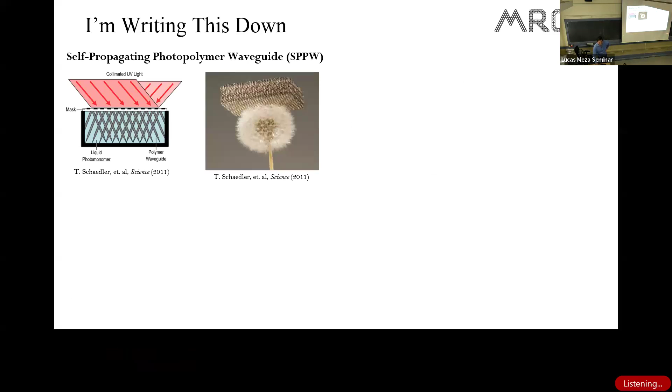So there are a lot, let me see. I'm an expert in two-photon lithography. Here we go, so I had an intro slide that I skipped over because that wasn't the focus. A lot of this started 15, 20 years ago with self-propagating photopolymer waveguides, so lithography, but directed lithography with thin film coatings on top. This was out of HRL Labs, they made the world's lightest material for like 3 months, and then they got beat by somebody else. But it's a really cool picture, it's like a metal lattice sitting on a dandelion. You can use stereolithography just with microscope objectives to scale down the feature sizes. You're limited a little by the wavelength of light, you just can't beat physics at some point to make things teeny tiny.

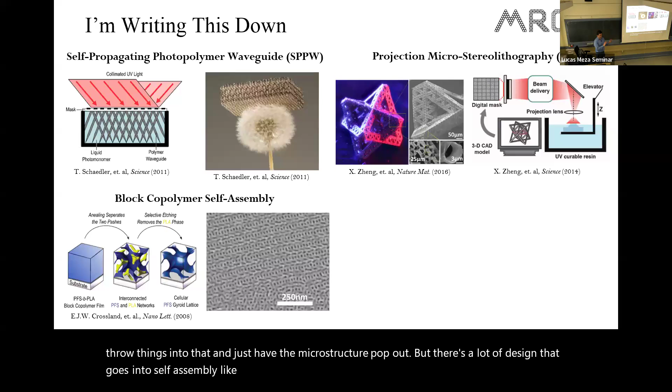Self-assembly is really the way to go. This is like what we want to do, throw things in a vat and just have the microstructure pop out. But there's a lot of design that goes into self-assembly, like chemical design, that is way outside my wheelhouse, and I'm very glad I have chemistry collaborators to do the chemistry for me. This is a very hands-on way of designing a structure, it's just a nice tool. But self-assembly is the ideal, just not yet.